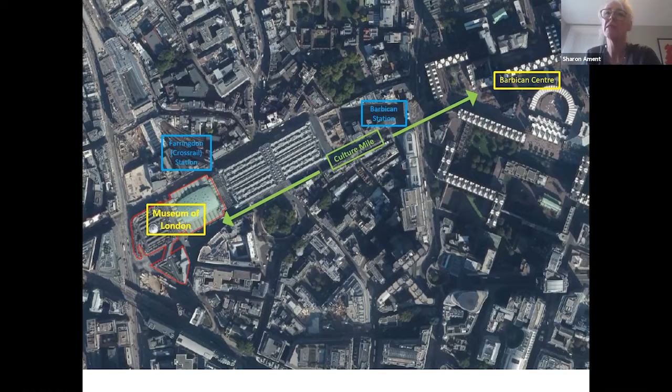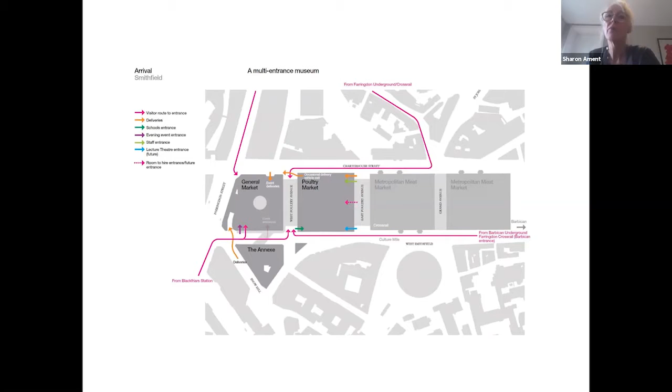And here you can see the kind of connectivity that I will be talking about a lot. The museum will have up to 5 or 6 entrances or even more. This is quite extraordinary and has enabled us to make a museum which will be adaptable, flexible, never-ending, and go into a kind of 24-hour way of being. Again, I would argue, like no other museum that I know.

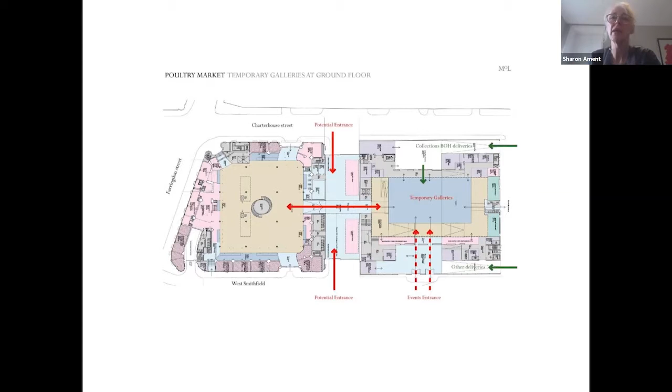Looking more deeply into the plan for the building, you can see how on the ground level the building works. It's got an east and a west wing, connected very simply by the street, called West Poultry Avenue. We want to keep that street as much of a street as possible, even though it will be our main entrance.

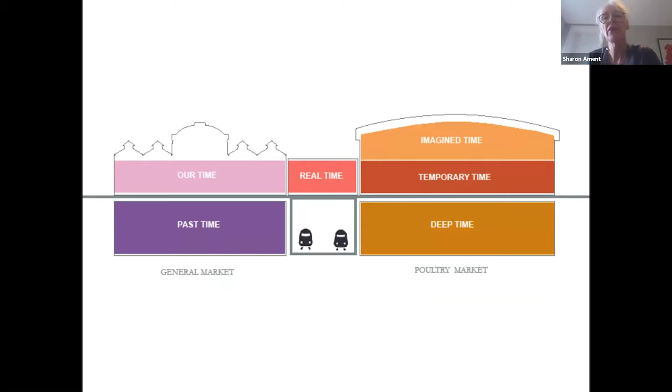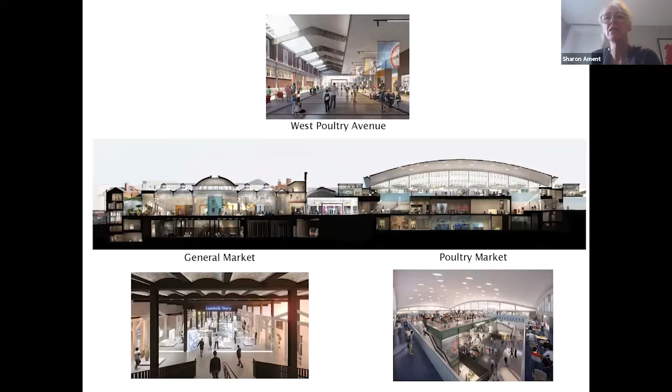We're structuring our content across the spaces that we have in a time dimension. And each one of these spaces does something different, and it does something very innovative. Extraordinarily, we have a live train line running between our spaces. And here they are, as conceived by the architects and designers. These images change and develop over time.

Our design team is led by Paul Williams of Stanton Williams, with Asif Khan of Asif Khan Associates, and Julian Harrap, who is the world's most fabulous conservation architect. Together, this team with many, many others are crafting and creating a museum.

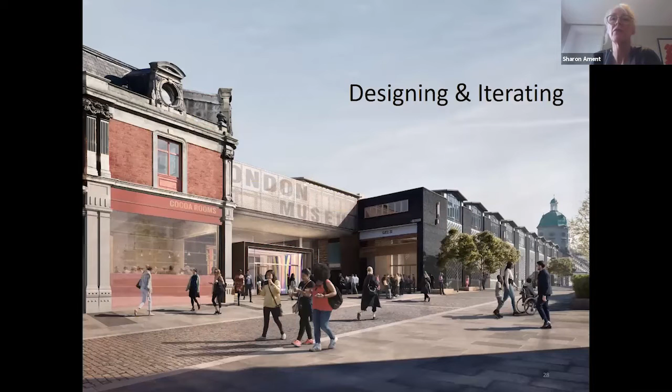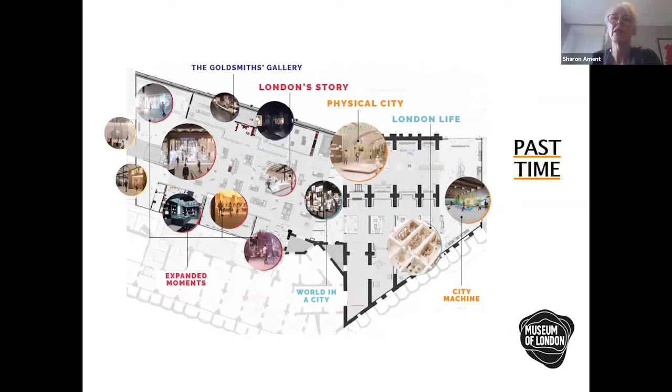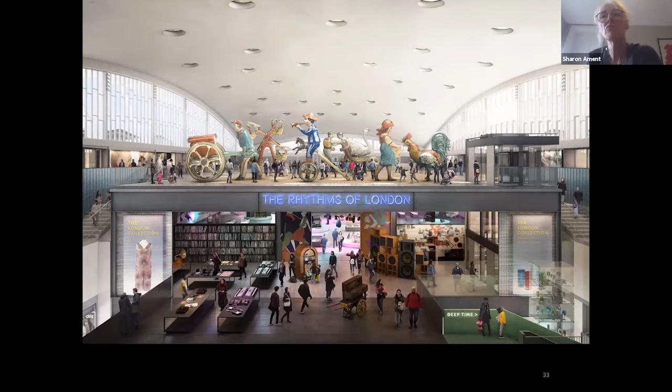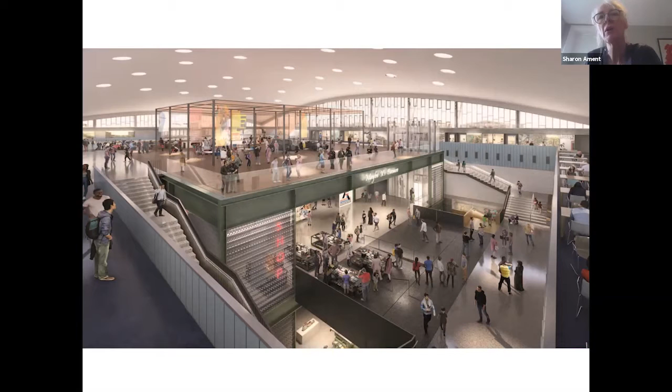In the poultry market, we will have a special exhibitions gallery, Contemporary Time. And on top of that, next to all of our offices, will be Future and Imagine Time. Our museum's time dimension really does think about all the possibilities for London. And right in the basement of the poultry market is the evocative Deep Time with the London collection. Not a sleepy, dusty collection, a collection which is used by researchers, by people, members of the general public who want to explore London through its material culture.

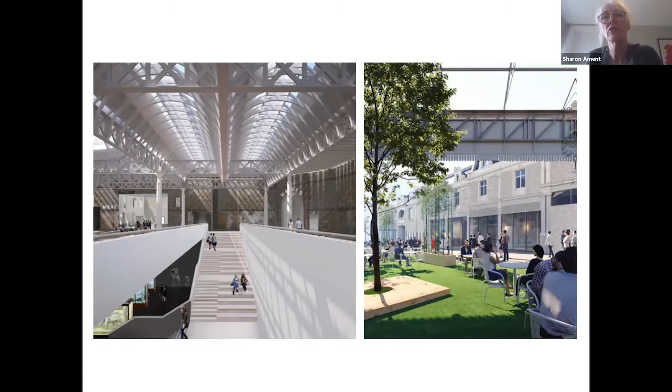There are ways down into the buildings and ways out into the street. And it will hold such enormous and wonderful things as those we are collecting today, as well as deep time collections. So things such as the Fatberg, for which we have become notorious, or today, which has just launched this week, a really wonderful exhibition called Dub London, about dub reggae and London's role in creating this music genre. Or how about London Calling, where the Clash, in the 70s, through the kind of feelings and ethos of London, responded with this landmark album and music.

Or through things such as archaeology. This is a recent discovery. It's currently on show in our Museum of London, Docklands Museum, the Havering Hoard. So we have objects, people, artwork, ephemera, all sorts of things in our collections which will be on show.

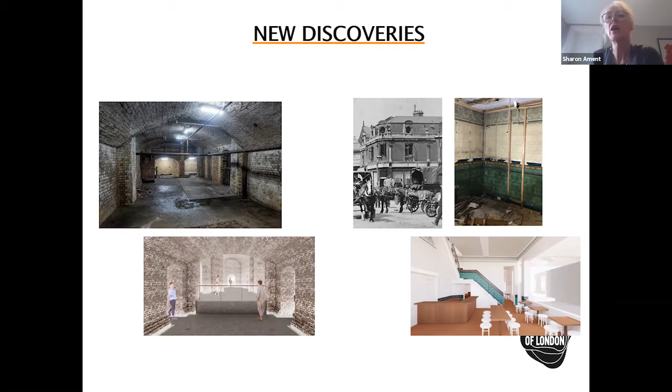As well as oral projects such as our own Brexit bus. And throughout all of this, we've been discovering new things. We found a whole area, a set of vaults which nobody knew existed. That's there on the screen. And on the other side, you can see this wonderful Victorian cocoa house, which is part of the temperance movement. We stripped away the 1960s paneling, found these glorious Victorian tiles, the original ones, and we will make that into a cocoa rooms and sell the best cocoa in London.

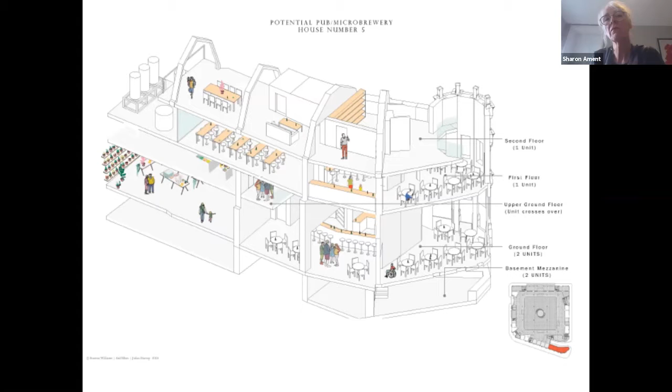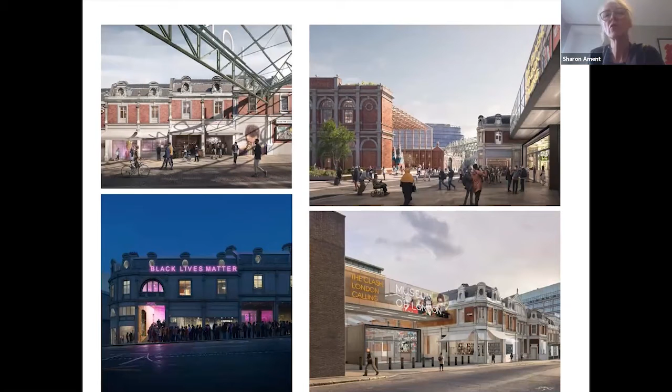And here you can see not only inside the museum but facing outwards, there's the opportunity to have new sorts of shops, to rent spaces out to organizations who want to participate with us. So the museum is not just a place for itself, but is a place where we have other organizations. And we certainly go out into the streets. Chris will be talking about that connectivity between all the sites and the street scene, which is going to be really important. And some ideas here in the design for the annex building, which will provide a really enormously wonderful connectivity with the museum.

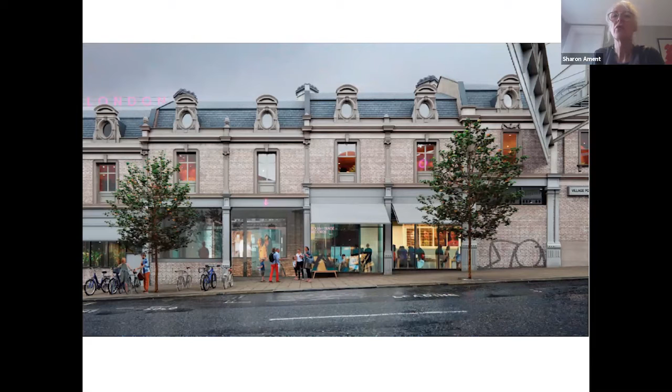And you will see here that graphics is starting to really play a big role. Here we have the biggest sign of London on the street. People will be able to merge inside and outside through the shop faces that face the street on the museum. And as I said, graphics will play a big role, harking back to those Victorian days. And here are some images in which we, the museum, will start to play out on the exterior of our building, ideas and concepts. This could be Black Lives Matter, not just a sign for the museum, and so forth.

So using all elements of that is given to us in the buildings around us, and we will inhabit these streets. And this is what they're looking like now. It's a glorious opportunity for us to reshape a part of London. We'd love to hear your ideas and questions as we go into this really evocative space, Culture Mile, which spans a whole area. So now I'd like to hand over to Chris, who will tell you more about the rest of the project.

Okay, well, thank you, Sharon. Amazing project, amazing presentation. I'll try and do yours justice as well. So to jump straight in, it's not just me, Chris Bonner, working on the wider Smithfield transformation. There's a huge, huge team of experts supporting us. And we're a bit behind the curve compared to where Sharon's got to with the museum project.

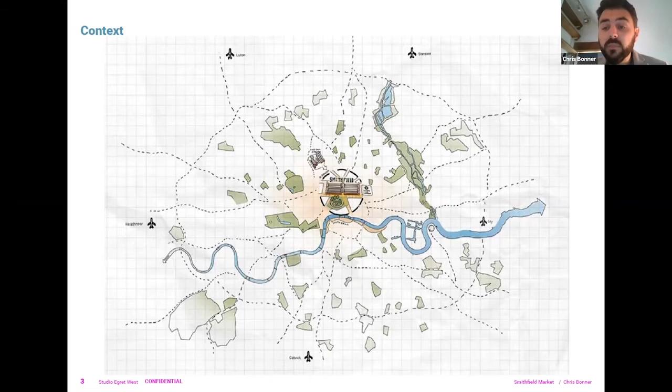So I'm not going to go into the geographical context of Smithfield because Sharon did that very eloquently, smack bang in the middle. But I'll give you a quick context on the wider programme this presentation sits within. It's called the Markets Co-Location Programme. Effectively, the city is under an Act of Parliament to run London's wholesale food markets: Smithfield Meat Market, why we're here today, Billingsgate Fish Market, and also New Spitalfields Fruit and Veg. We're scooping them up and moving them to a co-located destination in Dagenham Dock in East London, London Borough of Barking and Dagenham, to secure their future, but also to release the existing sites for other reinventions of themselves.

Whilst the positioning of Smithfield is really important in Sharon's last slide, Culture Mile, it does go beyond that. I would wager quite a few of us have been to the Tate Modern, skipped across the Thames to St Paul's, had a lovely experience, and then gone home, rather than going the same distance to Smithfield. So the challenge really is for the city more broadly to reinvent itself, not only as the financial powerhouse district for London and the UK, but also this awesome cultural destination, showcasing a huge millennia-year-old legacy of buildings and institutions.

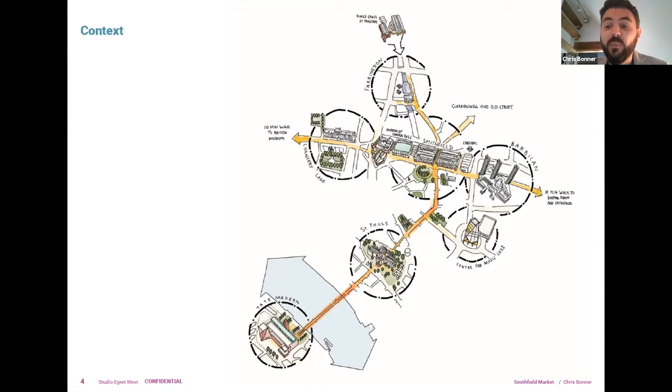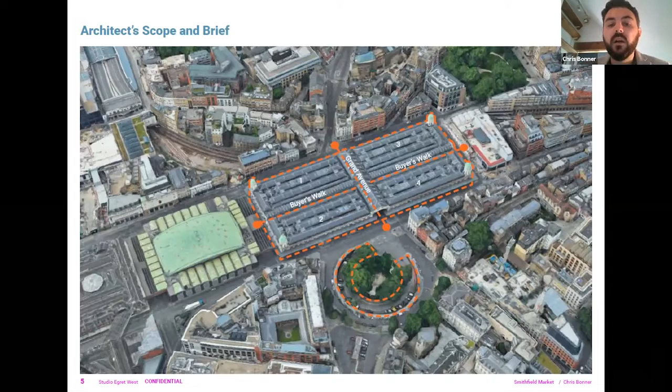This presentation mostly focuses on these buildings in orange - the grade 2 star listed East and West market buildings, and this rotunda just to the south of it, with a lovely ramp that leads you down into this mysterious basement space. It's rather magical. I'd insist you go down there and have a look if you haven't already, because it's this amazing underground world. But my project, and Sharon's, sit within this wider context.

So the buildings - and there are others too that the city is looking to develop - need to be stitched together by a coherent public realm, and that's what we've been working on also from the beginning of the year. The strict limits of that public realm is the purple bit of this diagram, but clearly where people are coming from, the influence on the strategic road network, desire lines, push us into places like Islington with our thinking - that's the more amorphous yellow blob that goes around the immediate focus. Having a single vision, even though elements will be delivered at different times, is key.

So whilst we'll go down to the detail earlier of how the public realm will work around the museum spaces, what they need to do is make sure whatever we do there can be coherently linked with the market spaces, which will come a few years later, because we're a little bit down the line.

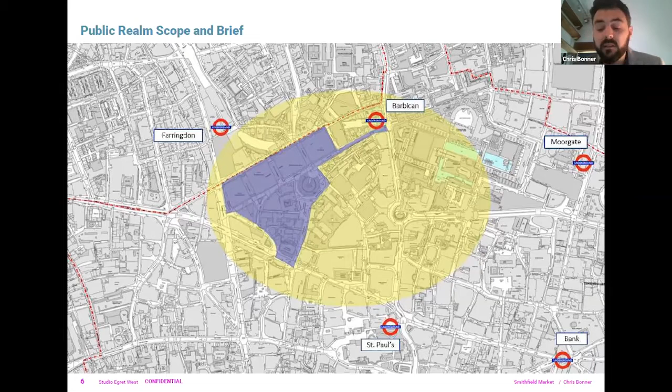Really for the buildings in particular, it's a real challenge to get this right. I guess as the current custodians, all we can do is make sure the next iteration is good for the next generation before it evolves again. And that's kind of the beauty of Smithfield - yes, it's known as a place of food for the last 150 years, but for 800 years before that it was something else. It's constantly evolved and changed - a place for trading, a place for exchange.

More recently, it's the 900 years of Bartholomew's Fair next year - how about bringing the fair back? And there are all these historical links too, like Cloth Fair historically, maybe with the future of fashion going forward. Just a few words to put on screen here that resonate with me, and also with our audiences that we've been talking to.

Gritty is a nice word, and I think sums up the market pretty well, and we want to maintain that authenticity. It's a big buzzword over the last couple of years, and it's really challenging to achieve. But we know that's the ultimate goal. They're really hardworking, a little bit chaotic places, and I wouldn't want to lose that in whatever iteration we have going forward.

Buildings look like they might be quite easy to read, like they're big tents basically, but they're not. When you begin to dive into the detail, they're actually really intricate and very interesting spaces that I can't possibly do justice to in this presentation. A lot of the innards of the building were scooped out in the 90s to meet modern regulations, and whilst that's sad because you've lost some historic physical content, it means that as long as you preserve the skeleton of the structure and enhance that, there's a great opportunity to do loads inside the buildings.

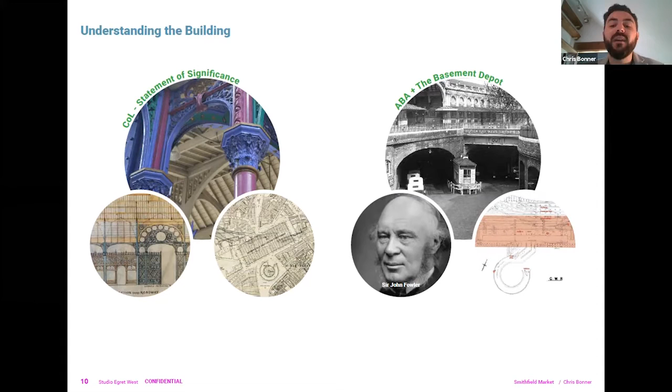There's always a shout out to the architect, Sir Horace Jones, for his 152-year-old buildings, but the engineer was a legend as well, Sir John Fowler. As I mentioned, the basements used to be served by railway tracks - they are rather wonderful, so we've been exploring those a lot recently too. We have lots of different ideas about what these spaces could become in the future - they could even be a complementary medium-sized museum, who knows.

One thing that has really got traction and we are seriously looking at is this destination, this international hub, the creative industries to come together to service their local communities, London more generally, but also that international audience. So you could imagine this combination of design, art, fashion, film, even emerging industries like gaming coming together under one roof with food right at the heart of the offer.

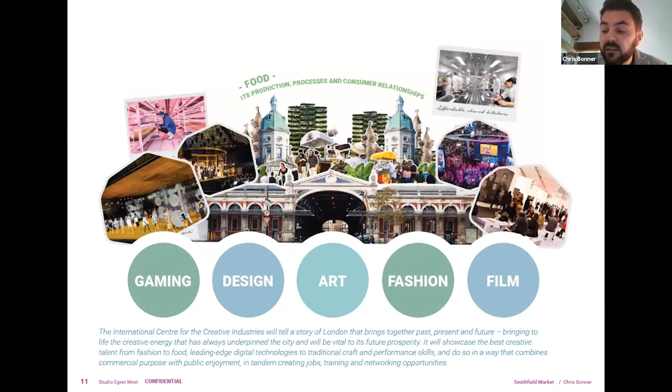I'll come on to that in a minute. Creating that new visitor destination in the middle of the culture mile would allow new jobs, potentially 1.5 million visitors a year. But what it will really do is allow the city to showcase its talent, new technologies and innovation.

I appreciate you won't be able to see all the detail on this slide. You don't really need to. What it is mapping out is the different uses in the local area. And I think hopefully what you can pick up by the picture is the variety of colours, as in the very diverse, probably unique mix of uses that surround these structures.

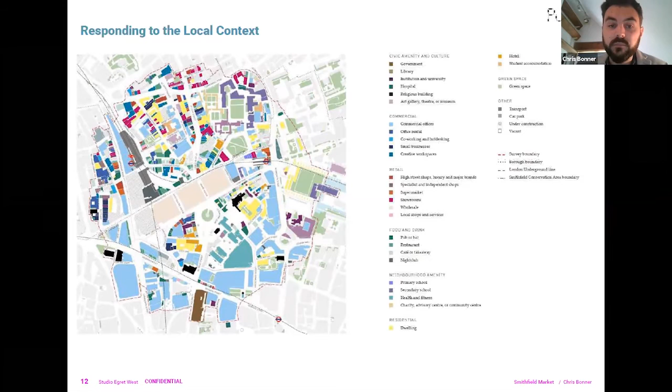So when thinking about place and placemaking principles, we have 5 or 6. I'll whiz through now. Clearly, this needs to be a place for all Londoners. It needs to be open, accessible, this inclusive metropolitan destination space that people want to come to, they want to linger in.

Got to be this connected campus. So we've obviously heard about the General and the Poultry, the East and the West, the Rotunda. They need to work together in this connected Smithfield campus, but they also need to relate to their institutions. I mentioned St Bart's, you've got the Charterhouse on the corner, you've got the Haberdashers. There's a really rich mix of uses in the broader area.

And I, like Sharon, think these should be 24-hour spaces. Now, I'm not necessarily saying we're going for Fabric Mark II, but you could imagine quieter eating spaces for, say, shift workers at Bart's, whose lunchtime is at 3 in the morning.

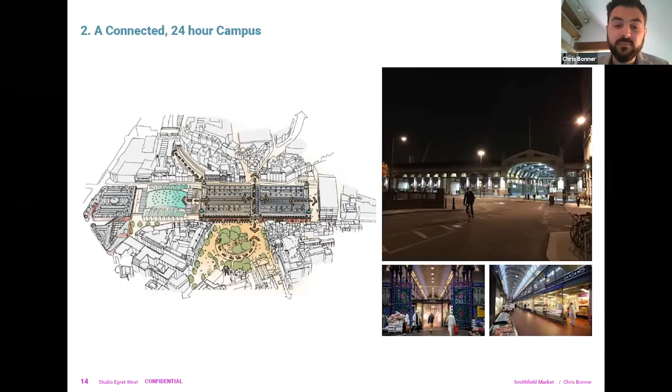Also, I think it's really important to reveal the historic structures. So they've been filled up over the years for operational reasons. That's totally fine, and we know why that's happened. But actually, now we've built this so-called BIM model, a 3D model that you can interrogate, you begin to see the layers of history within the structures, and revealing them, in particular the roof structure. Being up close to that roof structure is an amazing thing.

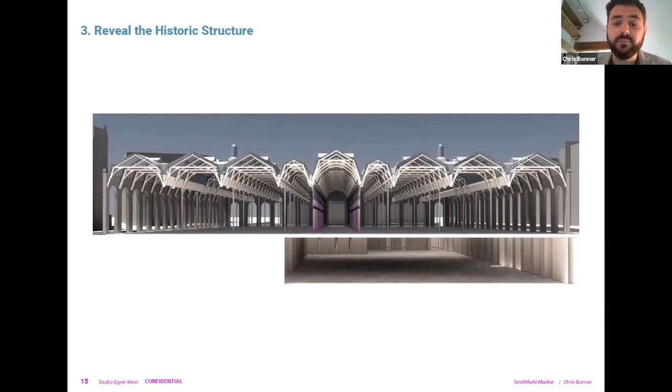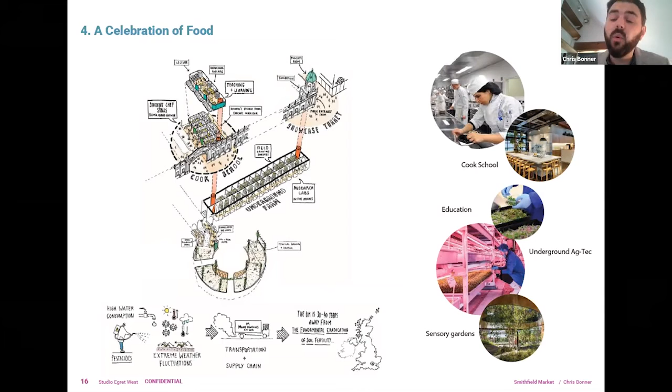I mentioned food, that's one of the place principles. This will be at the heart of the Grand Avenue's offer. And we want a very different offer to food in the wider area. So we see almost like an agri farm in the basement, the opportunity to grow on site, to prepare on site in a cook school, to sell and actually consume, all within one ecosystem.

And then the last principle is meanwhile. So whilst, for me anyway, I need to go through a private bill, I need to build a new market, and then the meat traders need to agree to move out before we can do any of this transformation. We're starting that journey now. This is why it's such a great opportunity to present today.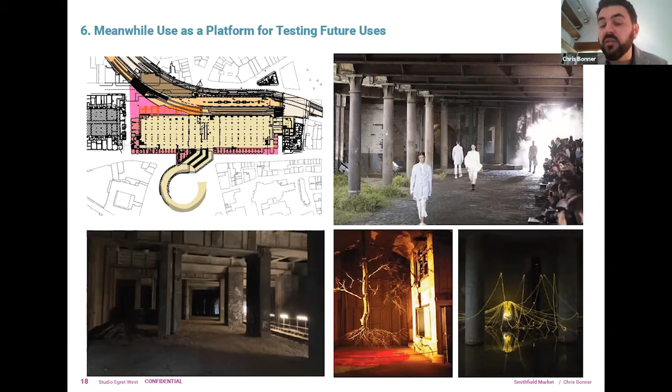But we can also start that journey in areas of the building and areas around the building that aren't required for operational purposes. This is a rather provocative image of a part of the basement too being turned into an art installation or fashion show, for instance.

So I just want to whiz through, there's about 10, and I'll be quick, interventions that unlock these opportunities, that allow for these different flexible showcasing spaces.

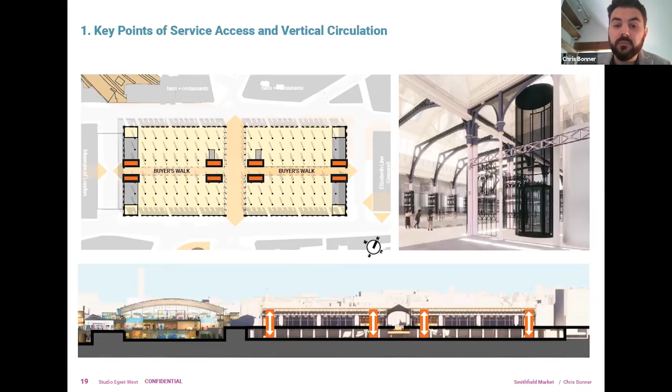The first is points of vertical circulation, basically being able to get up and down the building. It's not the easiest thing at the moment, so we need to make sure that this is a fully inclusive building. We think you can get a different experience at different levels. So these rather lovely gantry areas, which maybe this sketch - don't have lovely CGIs just yet, but I hope the sketch begins to give you an idea of how you can interrogate and experience the buildings at different levels that you can't at the moment.

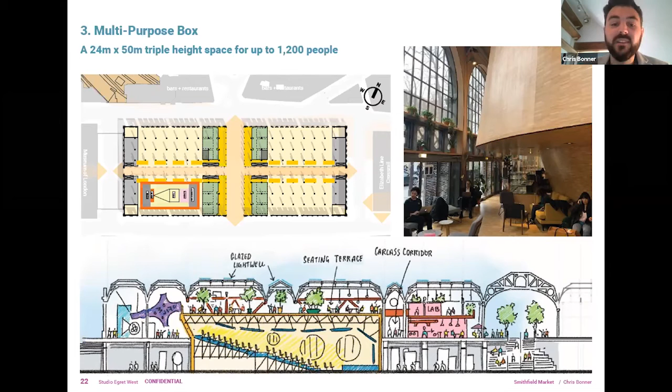There's an idea around what we call an historic cruciform, with the north-south Grand Avenue and the east-west Buyer's Walk. That gives you four very large, very attractive quadrants to play with. One of them, for instance, could be—probably need a better name than multi-purpose box—but what I'm trying to capture is it could be an auditorium space, a space for local performances, or flexible showcasing, as shown in the cross-section at the bottom of this slide. And just some views from the model I mentioned earlier.

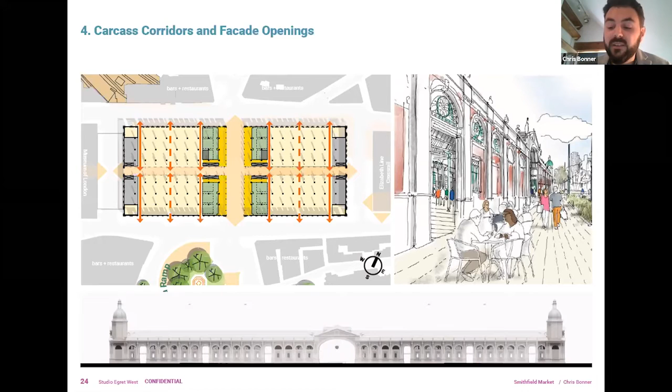The building over time has turned its back to its surrounding environment. I understand why it's an operational space, but that's not what we want going forward. So as well as having the Grand Avenue open to the public and the Buyer's Walk as much as possible, there are these lovely things called Carcass Corridors—what the butchers call them—which is effectively where the big old vans dock at the moment. You could open them up and allow more permeability and porosity to the building. And as the Victorians always did, they got it right. This is a lovely plan form produced in the Victorian era, and we're kind of reinventing that.

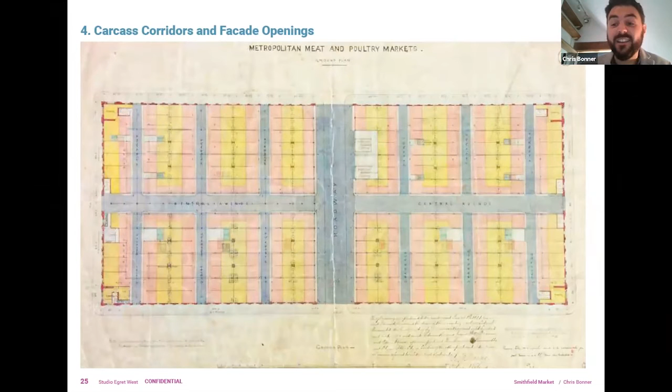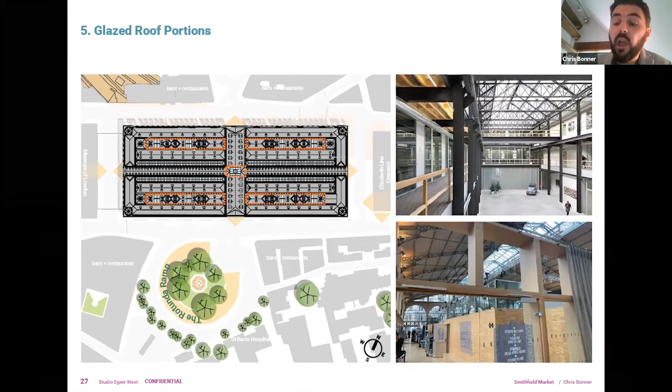But to do that, we'll need to put more light in. You can imagine atrium spaces pouring light down into those flexible showcasing spaces at grade. You could even imagine somewhere like Barts Hospital taking over some of these spaces for what they call a wet lab, their research centres.

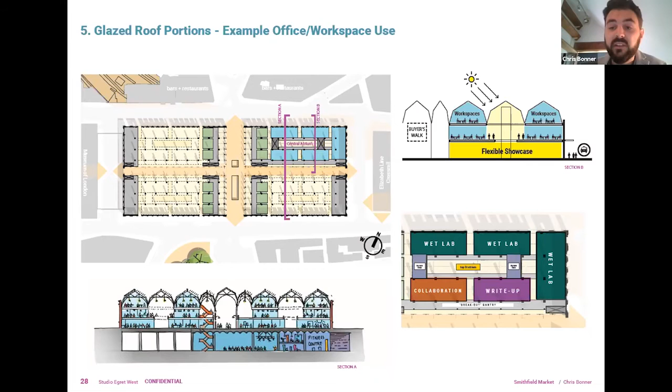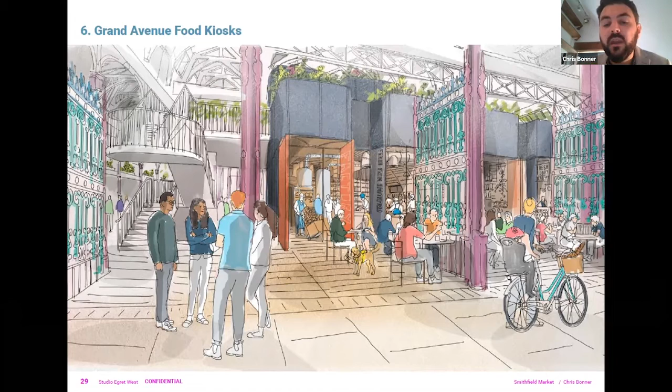Quite a large intervention into the space is what we're calling the Cut in the Grand Avenue—that kind of public thoroughfare smack bang in the middle of the buildings I've been talking about. That allows a lower Grand Avenue to be created, and it really allows the interoperability of the building. So at certain times of the year, it could be an event space for one operator that could take over the whole thing, while allowing that publicly accessible route through the building into the rotunda.

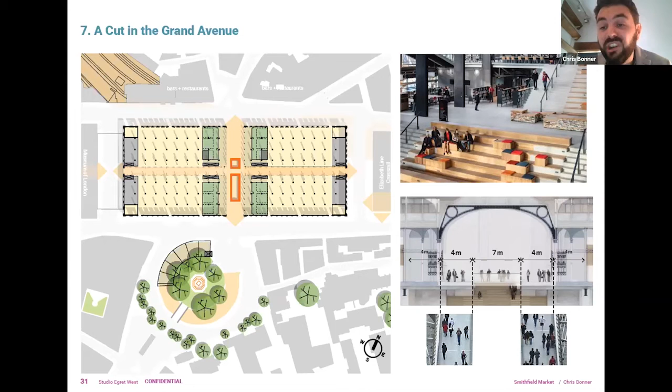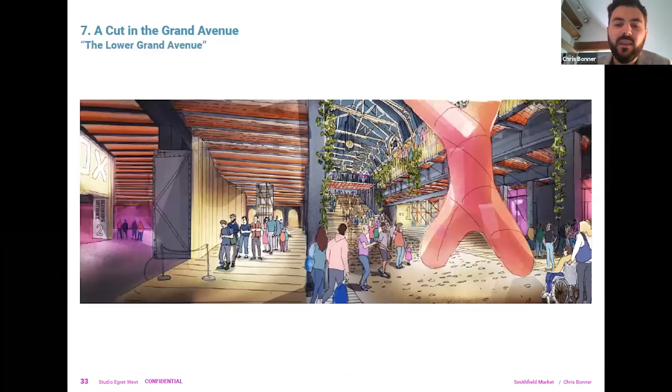These are very large spaces. In the bottom right, that's Millennium Bridge either side of the cut, just to give you a sense of scale. And this is what the Grand Avenue could look like, with a giant piece of art coming out of the middle. As you go down those steps, you've got that box I mentioned on the left. This is in the basement areas, so the agri farm I mentioned, growing in the basement.

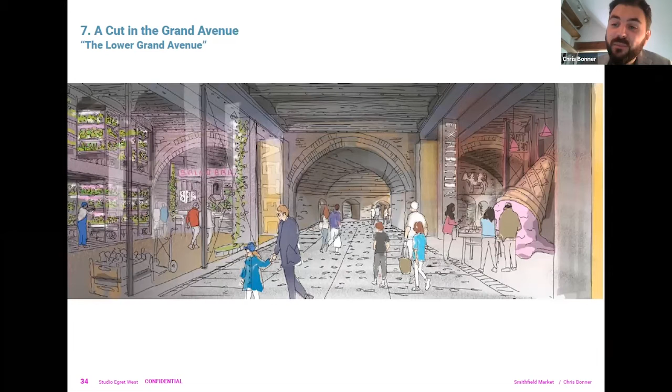Lighting is really important—you can really paint a canvas with lighting. You don't want to overdo it, but you want to celebrate that Victorian architecture, retain that industrial flavour and grit I mentioned at the beginning of the presentation, but also embrace all the amazing projection, lighting and digital controls that you can do at the moment, really taking a beat from what the museum has done to date.

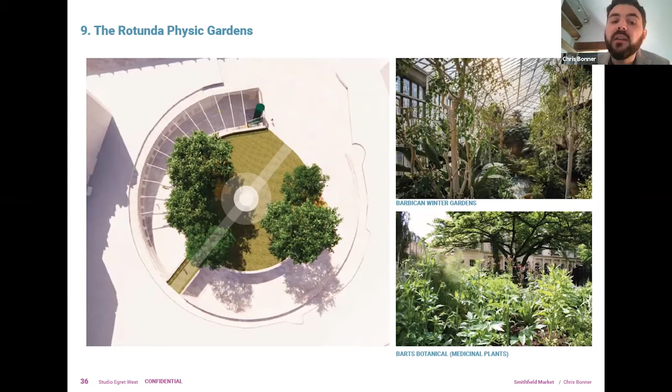The penultimate intervention is this Rotunda Gardens. It's a really lovely, magical place at the moment that not everyone knows is there. It's quite difficult to get into, so we'll probably be bridging over this rotunda space to make it a bit more accessible, while also creating this winter or physic garden, like maybe medicinal plants.

This gives you a bit of a better view as you're down in that rotunda space. It's a really magical space with the cobbles and the warmth of the brick that leads into these arches, taking you into this basement world.

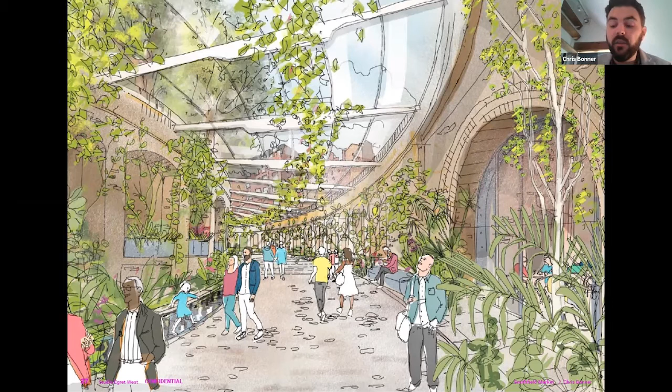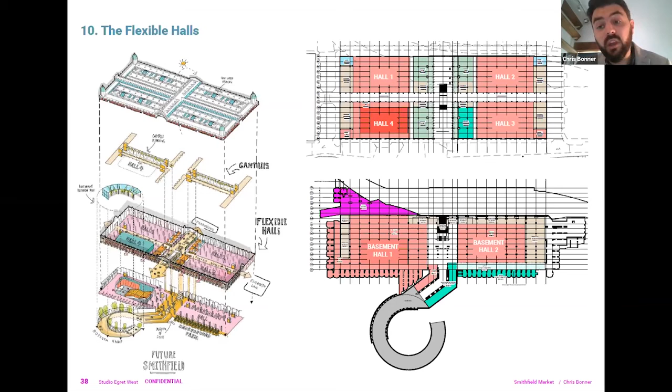A bit of a techie drawing, but effectively what this is saying is all those different interventions allow real flexible showcasing spaces to be created. There's enough fixed elements to have that vision I mentioned earlier, but enough flexibility to deal with a future post-COVID world. And just to end on a few hopefully lovely images of one of the halls as a fashion show, maybe an expanded Lisbon-style food offer.

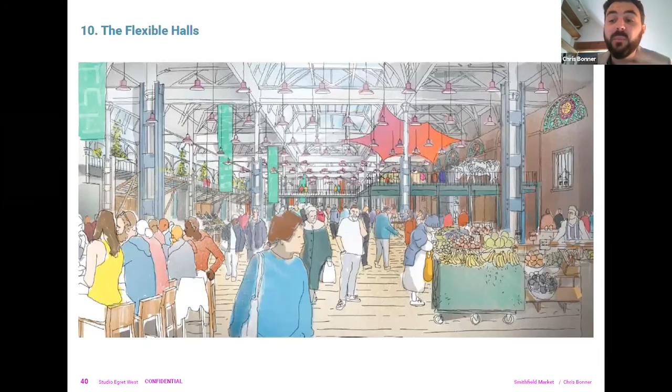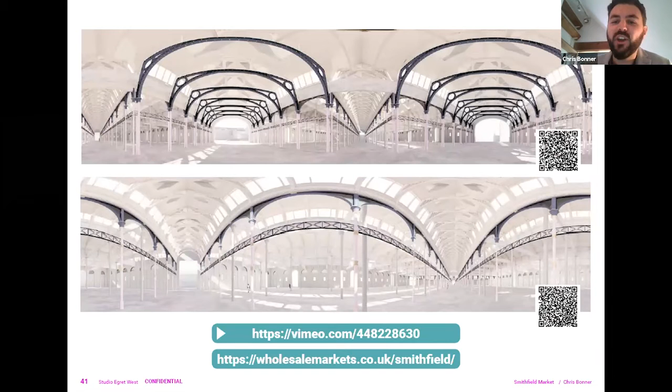There's a link there. You can't click on it, I suppose, but maybe you can copy it to go and interrogate the building without stuff in it. Okay, thank you very much.

Chris, I've been so delighted with how you've developed this work and how the design teams are really working closely together. It's great to see our projects and shared ambition riffing off each other. Our projects were conceived before a pandemic, and now we're living through a pandemic. In developing your project, how are you finding it working in this circumstance with design teams?

It's quite extraordinary, isn't it? I think it's really challenging because we don't have the answers yet, but we know there's a problem. Sometimes people might see that I used the word flexibility earlier and see that as a weakness in vision, but actually I think there's enough fixed elements to what we're proposing for it to have coherence.

But there's also enough flexibility to accommodate what the world is going to need in a couple of years' time, what types of creative industries will hopefully make a home here, how people need to interact with the spaces, whether it's distance or not. There's a lot of flexibility in the architectural approach.

So, for instance, that box I mentioned, everything is retractable, because it's like a transformer—you can turn it into different shapes. All of the interventions we're thinking about will be built off site, kind of prefab, then transported to the location and nuzzled in. So they're very flexible in terms of physically moving them around the space or packing them down and shipping them out when there's a new requirement in a few years' time.